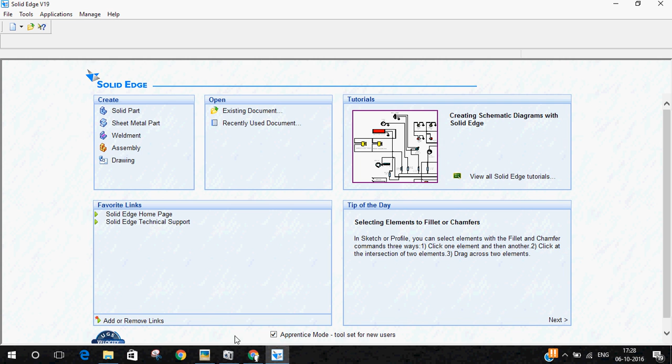This is part 3 of the Screwjack series. In this part, we'll be doing the third part of the Screwjack, which is the screw spindle. Okay, this is the screw spindle here. This part also should be done via the revolve protrusion option. So I'll select solid part. I'll go to sketch. I'll again select the front plane.

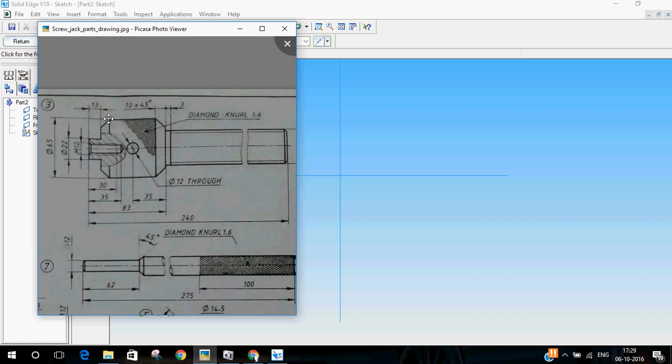So again we have to repeat the same thing that we have done in the previous two parts. Now what I'll be doing is, you can see this axis here, right? I'll sketch the parts above the axis. So what I'll do is I'll follow these lines this way. Then I'll finish it off with the axis. So I'll do the basic outline first.

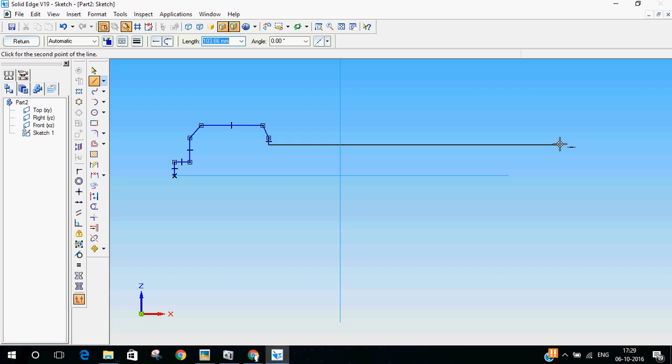Don't worry about the dimensions right now, we'll set it later. Just go on with the basic shape. Finish it off with the axis. Okay, it did not get connected here.

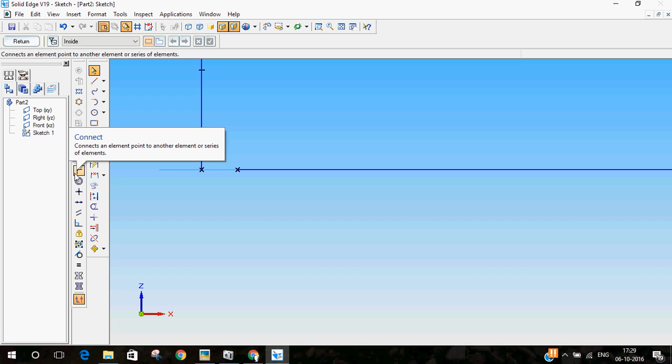If something like this happens, you don't need to delete and create a new line, or no need to add another extra line also. What you can do is, you can see the connect option here. You can select the two lines, select the connect option, and then select the line endpoint and endpoint of this line, and then they'll get connected. This toolbar here has many other constraint options which I'll be showing you later.

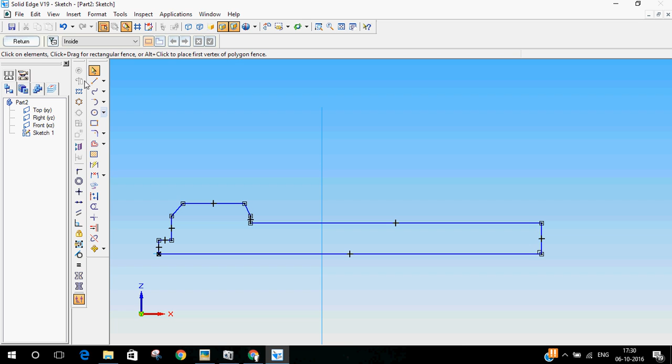So now we'll start with the dimensioning. We'll refer to our sketch. Okay, so overall length is 240 mm from this face till the end. So I'll select this, I'll make it 240 mm. Okay, it extended on this side, don't worry, nothing's wrong.

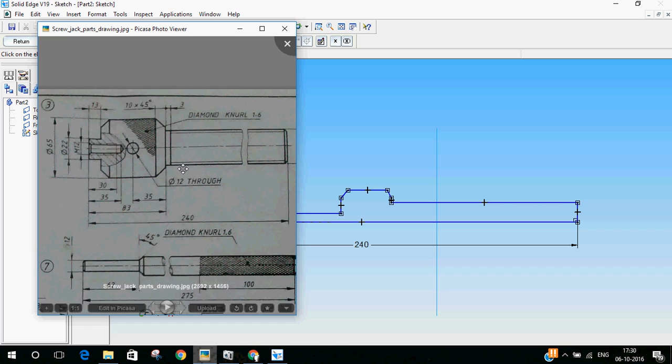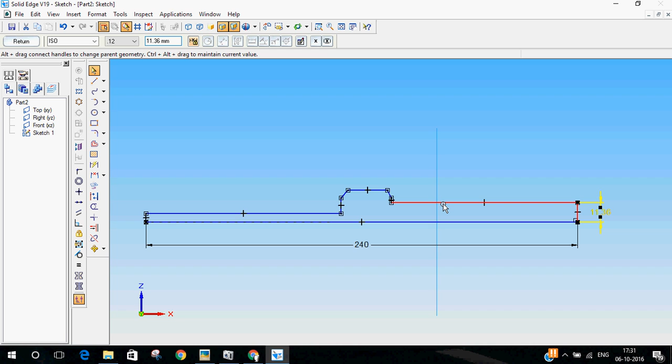Next thing is, this is again a threaded screw part. It is again 38 cross 7. This will go and sit in the nut. So we'll be doing this. This dia is 38. So I'll do that here. It should be 38 by 2. Okay. I'll do this later. First, let me go with the edges. I'll delete this. I'll do this first.

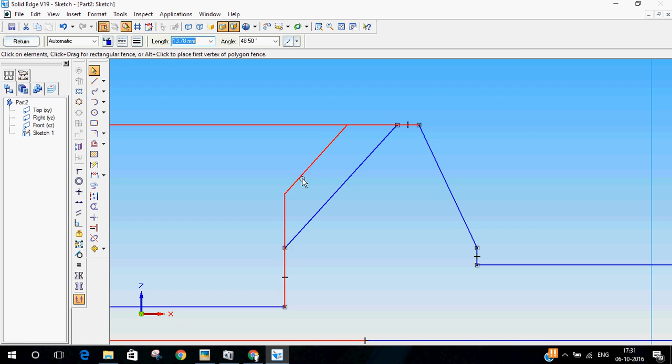This overall dia is 65. So it should be 65 by 2. I'll take this as 65 by 2. Okay, don't worry, nothing's wrong. These things will keep moving around. Since their dimensions are not set, they'll be moving around. We just have to take care of them. Now this is 22. I'll do it 22 by 2.

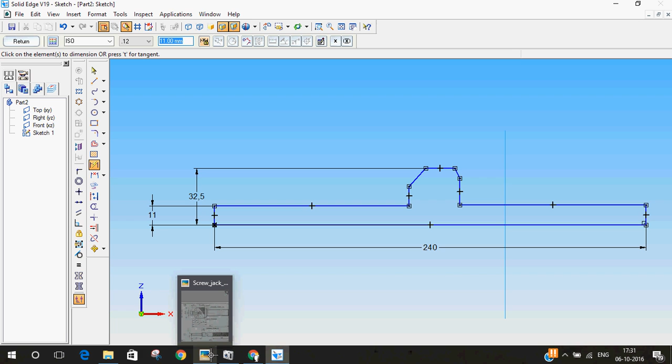Okay, the next one is, this width is 13. I'll do it 13. Okay, it went down, I'll just pull it back up. Okay, overall width of this part from this edge till this edge is 83. I'll make it 83 now. Okay, so this should be 83. Again it moved out, nothing to worry, just move it back down.

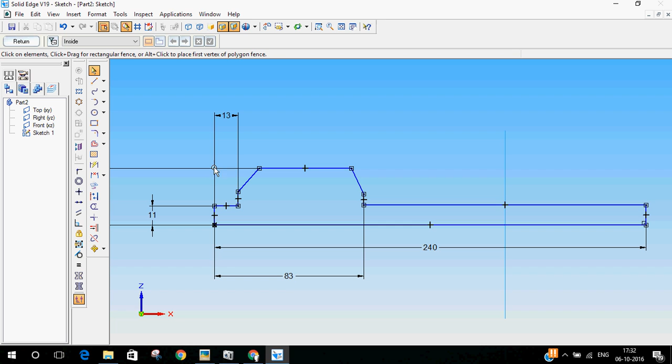Using the select tool, you can move anything which is not constrained. See, this is not constrained, I can move it around, but this part I set the dimension already. I cannot move this up or down because it's fixed. So next one is, don't worry about this 30 35, that is the hole inside, we'll do that later. Next would be

this part. This chamfer here is 10 mm cross 45 degrees. I'll just do it here now. So I'll select from this edge and this edge. This should be 10 mm, and the same way here also, this edge to this edge is 10 mm horizontal. Now this line should be 45 degrees. I'll set it 45 degrees. And even this line should be 45, that is minus 45 degrees.

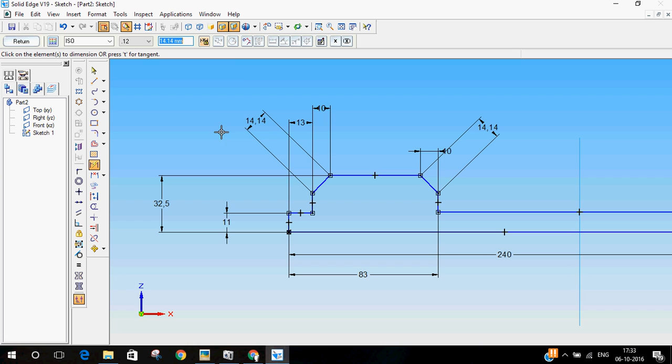Okay, this is done. So I don't think it's 45. Okay, it's minus 45. This is 45. Just put smart dimension so that that thing doesn't change. Okay, don't do it right now. We'll do it later. We'll see what else we have left out.

This 38 has been taken care of. This, okay, no, that has not been done. So this should be 38 by 2. Okay, that is done. 38 by 2. 38 by 2. The overall length is 240. That is done. This width is 83. Has been done.

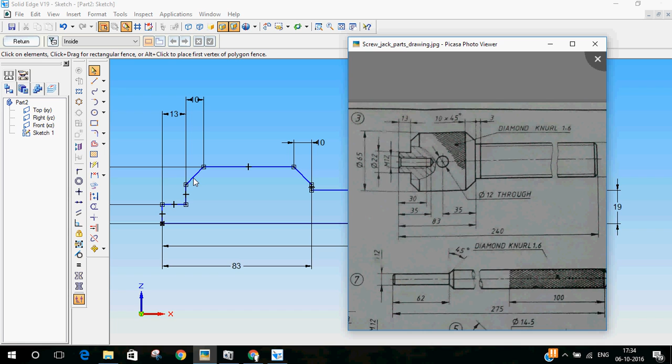And this is 10. Done. This 30, ignore it. That is for the threaded part. We'll do that later. This should be 13. This again is 10. This is 13. That is done.

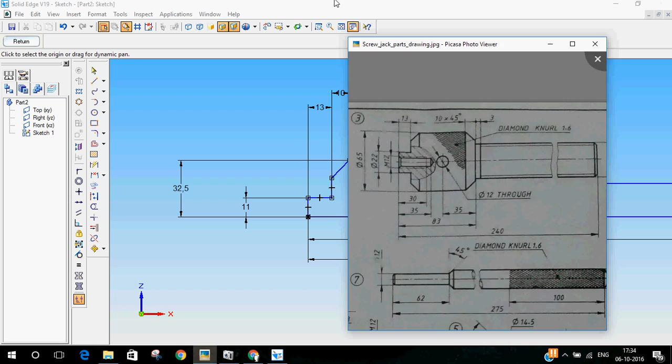And here this is 22. That is 22 by 2 is 11. This is 65 by 2 is 32.5. So now I think every dimension has been set right. So again verify whether these are 45 degrees. Okay, this is 45. Okay, this is minus 45. Okay, everything is done. I'll return this from the sketch.

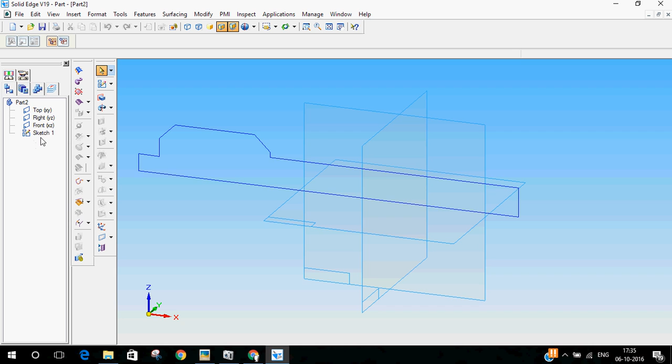Let me select revolve protrusion. Select the sketch. Okay, I had to show you one more thing. I'll show you now. Click on cancel. Click on sketch, edit the sketch. As you can see, the axis is somewhere here. We'll just make it sit in the middle.

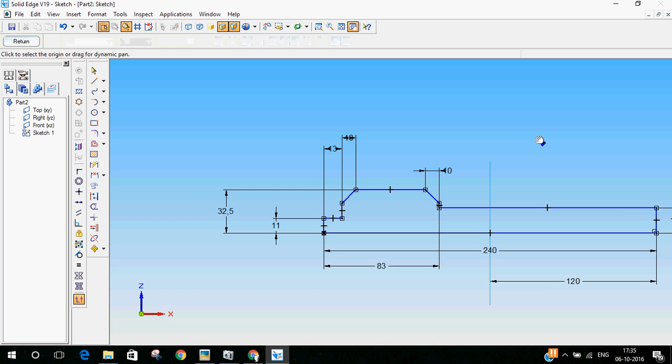So I'll select from one edge to the axis. The overall length is 240. So I'll make this 120 so that the whole thing will stay in the center. It'll help us in assembly. I'll click on return. Finish.

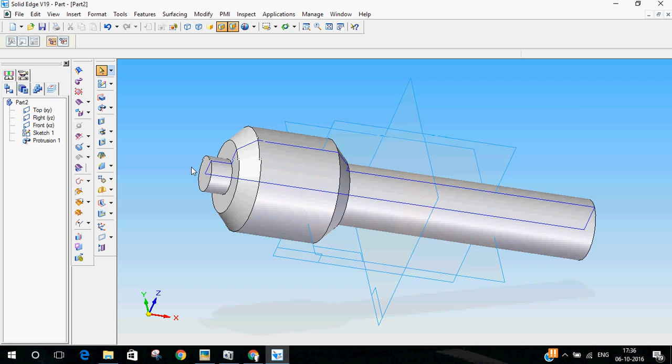Revolve protrusion. Select the sketch. Select the axis and then 360 degrees. Finish. So this basic body of the screw spindle has been done. Select isometric. Okay. Let me hide the sketch now. Always hide the sketch after the revolved protrusion or cutout options.

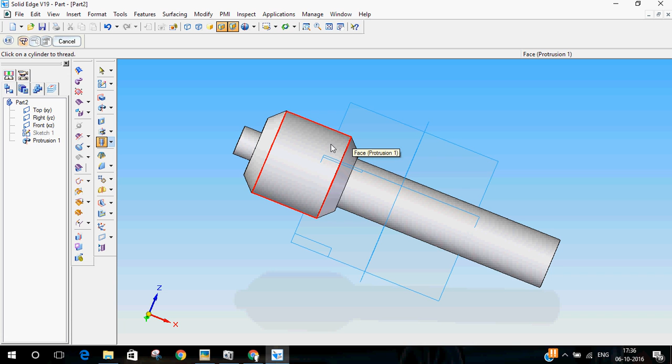Now what we have to do is we have to create the threads here. So for that, in this hole option, if you click this arrow, you can see the thread option. This options dialog box will open. Select straight thread. Okay. Now it's showing here what you should do. If you get confused, read the status bar. It will tell you what to do.

What it's saying is click on a cylinder that has to be threaded. So this is the cylinder, and now click on the end of the cylinder. So I'll select this end. Okay, so I selected the end and the cylinder. So now it's asking the thread. Okay, first we'll set the thread type. As you can see, the diameter is 38, so it will automatically set it to 38 mm. You cannot set any other options.

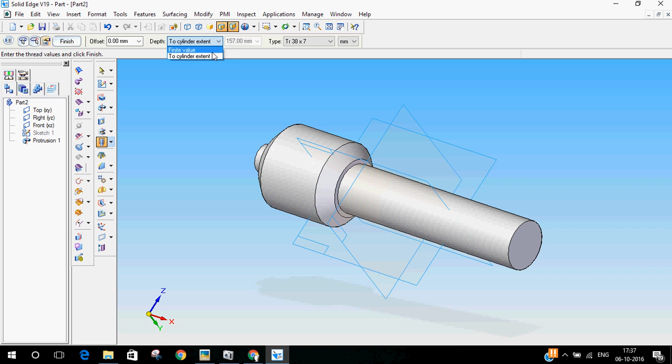So it is 38 cross 7 what we need. So I'll select 38 cross 7. The depth is not full up to cylinder extent. As you can see, there is a 3 mm gap here. So there's no threads in that part. So what we have to do is 240 minus 83 minus 3. So I'll select finite value. This should be 240 minus 83 minus 3. It will come around 154, I think.

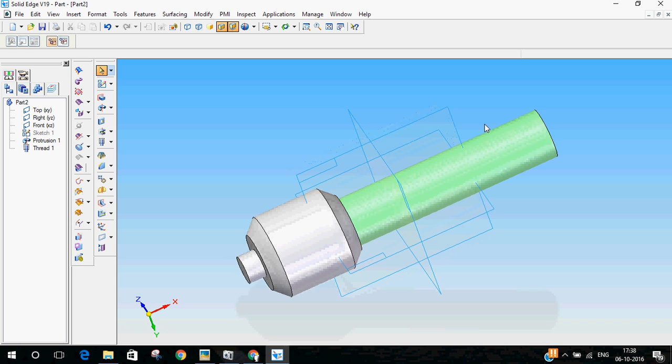So it has been threaded now. I'll finish it. The green part indicates that it has been threaded. And this chamfer in the end, don't worry about it. It is a standard for the threads, so it will have a chamfer, but you cannot see it right now. The next part what we have to do is this threaded hole here.

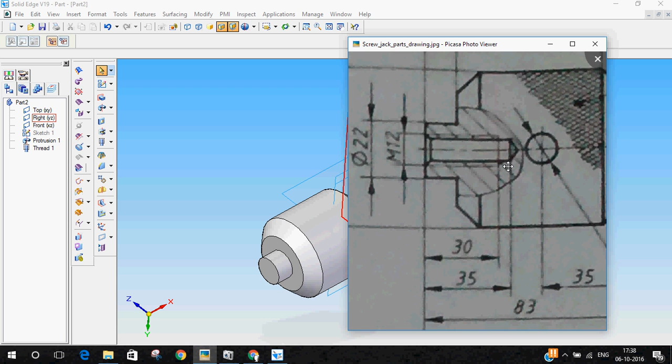They mentioned that it is M12. Let me zoom in. The thread depth is this dotted line, small lines you can see. The thread depth is 30 mm. The hole depth is 35 and it has a V shape in the bottom. I'll show you how to do that now.

Now select the hole option again. Click on this dialog box. So this box will open up. Now you have to select threaded option. This should be standard thread. The thread is M12 as they had mentioned there. So let me select M12.

Now here it is not to the hole extent and it is not through hole. So let me select finite extent and the extent should be 30 mm, which is the thread depth. So let me type in 30 here. Now we have to create the V part and the hole should be 35 mm. So as you can see this extent box here, select the last one which says finite extent.

So now the hole depth you can see it's showing in this small diagram here. The hole depth should be 35 mm. So I'll select 35 and tick on the V bottom angle. Select the first one. Don't change the angles. It is standard angle 118 degrees and click on OK.

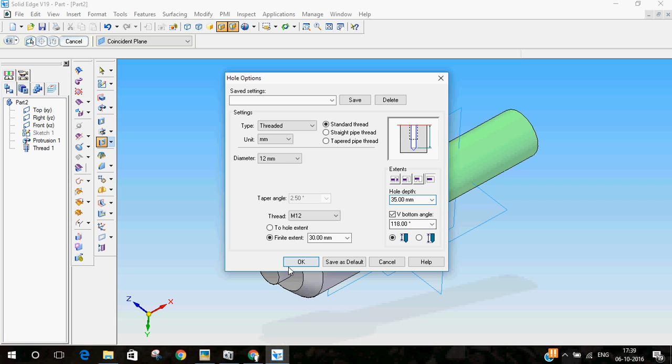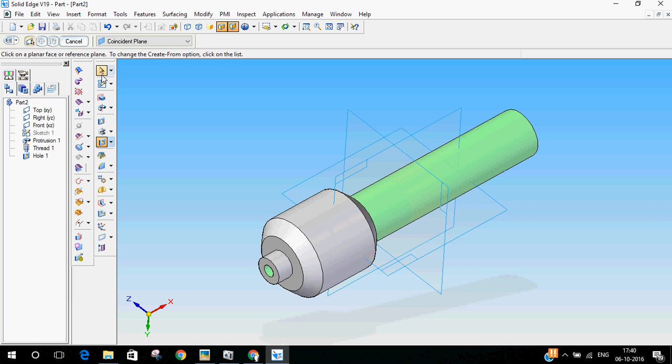Now again you have to select the face for the threads. You can see the threads are there already. Place it exactly at the center and then click on return. And again it's asking for the direction of the hole. Select the inside direction and then click. Now I can finish it. So the threads have been done and the V shape has also been done in the bottom.

We can have a look at that in the drawing sheet. So this part has been done. Let me save it. Let's save it as part number 3. This is the screw spindle.